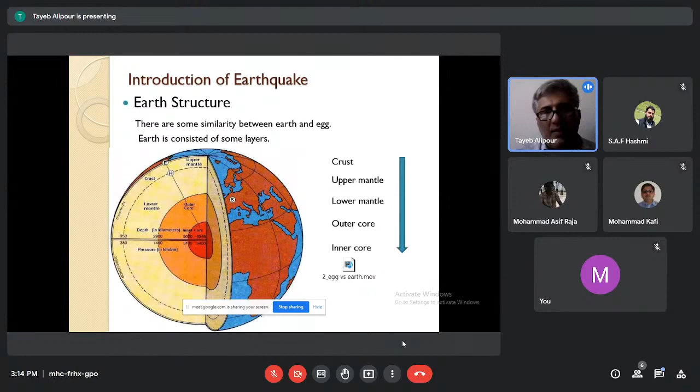6,370 kilometers is Earth's radius. In this slide, you can see the layers of the Earth with their materials. As you see, the inner core is solid and the outer core is liquid, then the mantle, and after that the crust. The crust is between 0 surface to 100 kilometers in terms of thickness.

And you can see other kilometers such as solid, liquid—for example, 5,100 kilometers is solid and 2,900 kilometers is liquid. Anyway, this is the basic information.

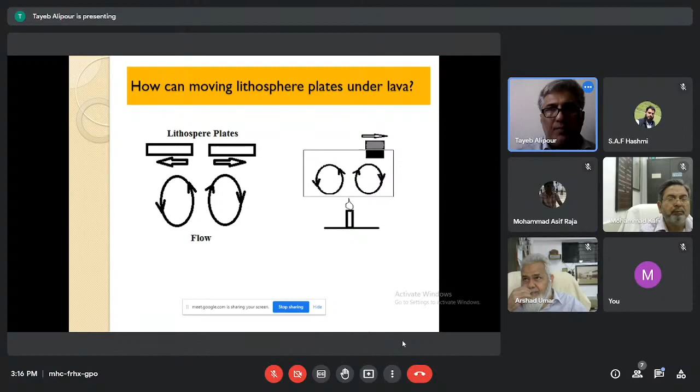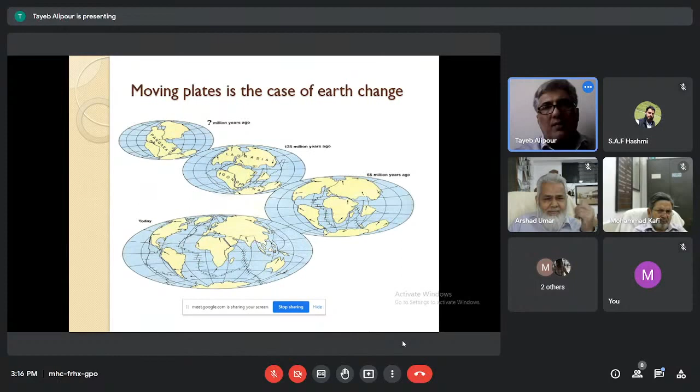You see on the left side, up to millions of years ago, all of the continents were together. After 135 million years ago, a little bit of change. After 65 million years ago, right side, similar to present. And today is the Earth as you see. But what will happen in the next 100 million years? Definitely it will change again because of moving plates. So Earth can change.

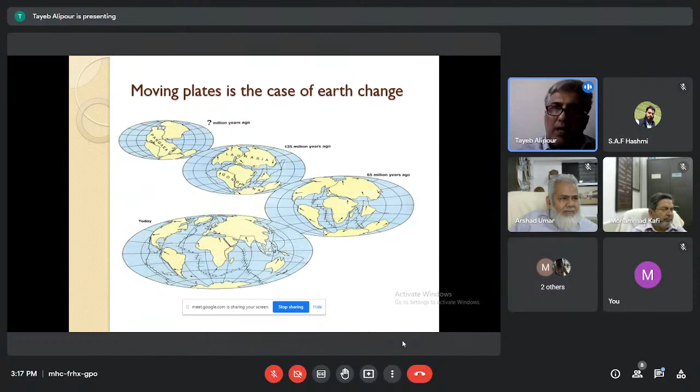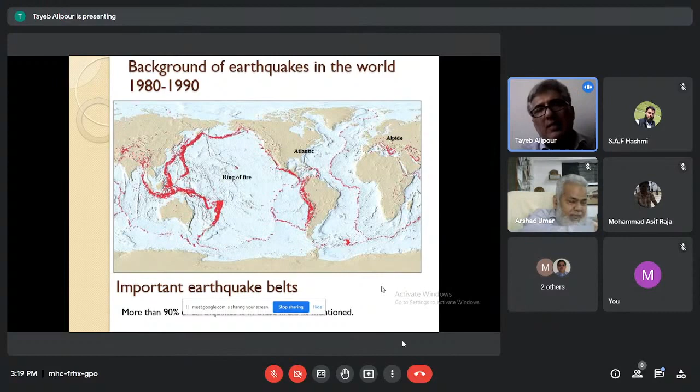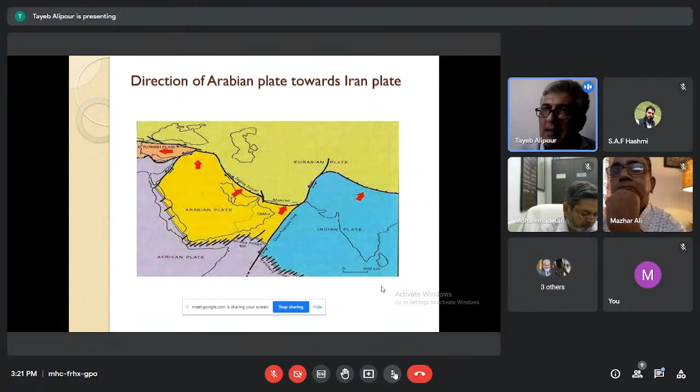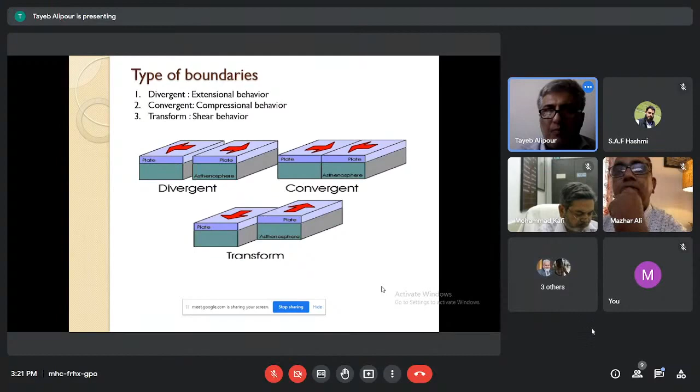There are a lot of movies, but we have not time because more than 168, I think, slides are possible to present in this time. So I can share this PowerPoint and you can see all of the movies at your home and your university.

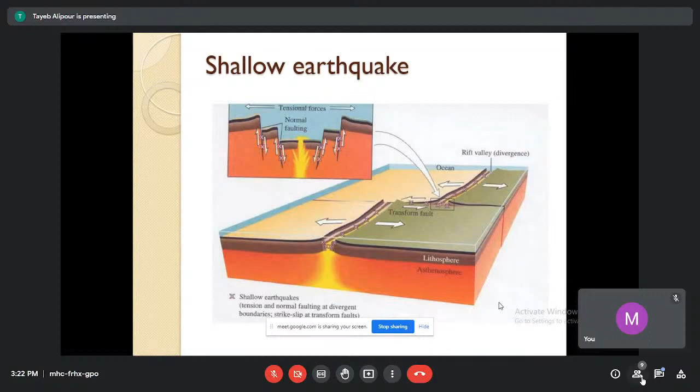Shallow earthquakes: tension and normal faulting at divergent boundaries, strike slip at transform faults, for lithosphere and other layers.

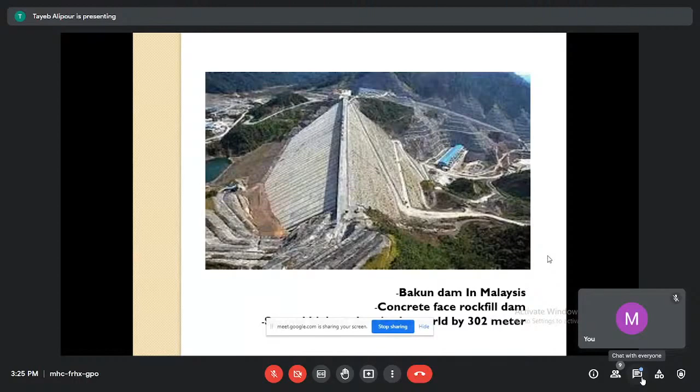And in this area, we have also peak ground acceleration, and it's under my study as I got it on 2012.

This is one example of dynamic analysis, and I use ANSYS software in this study. You can use ANSYS in terms of finite element, or ANSYS Abaqus, and in terms of finite difference you can use FLAC program also to analyze dynamic analysis of earthen dams.

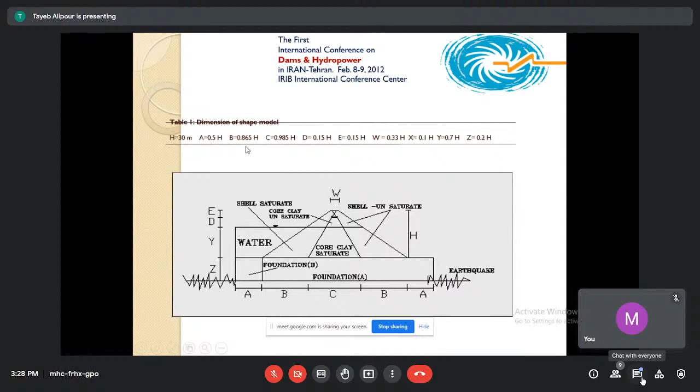You see the parts of the model, such as the foundation moved by the earthquake in this line, and the parts of the foundation behind the water, behind the saturated dam. You can see the core clay and shell, upstream and downstream, and the crest in this model. So I use this parameter, as you see, and analysis by ANSYS software.

I used the record displacement time for ANSYS. When I used ANSYS 2014 and 2012, I used displacement time, but with the new version you can use acceleration time, velocity time, or displacement time. I used version... this time is version 2021 possibly.

One more thing I want to share is that during the modeling, as you see in this photo, if you see my mouse, there are some key points to make a model: 1 and 2 at the crest, 3 up of the core at the middle, 4 middle of the core, and 5 middle of the foundation. This is the hot line, in fact.

During the dynamic analysis, displacement and acceleration at the crest is always maximum. Shear stress and shear strain behavior is so important to analyze for points 3, 4, 5, and others, but I focus on 3, 4, 5, 1, 2 because of their maximum value.

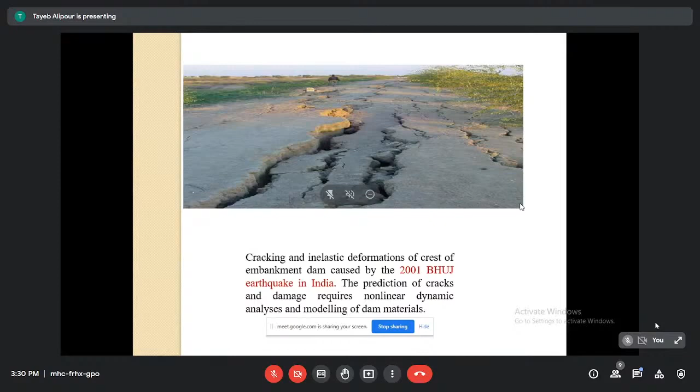Also, observation of performance of a dam during the 2013 Grassmere earthquake, upstream and downstream, exactly in this area, and at the crest you can see a lot of long cracks.

Also, observation of cracks. Next slide. You can see the various damages during the heat of water on the upstream, because this is dynamic pressure, not static pressure. When you focus on dynamic analysis, the dynamic pressure of water is so important on the upstream.

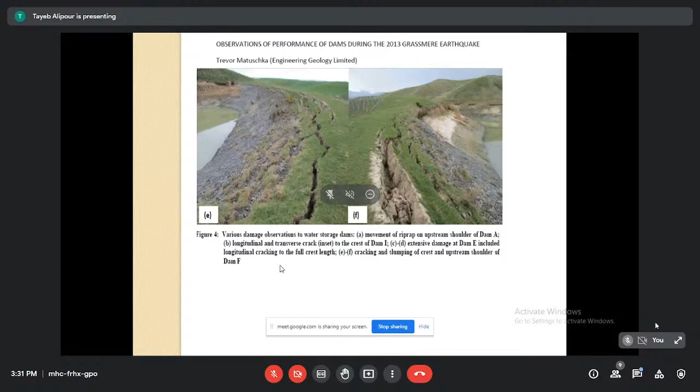You can see here, Tappar Dam displayed longitudinal cracks at its upstream during the Bhuj earthquake in India. Lateral spreading zone at the downstream of the Kaswati Dam.

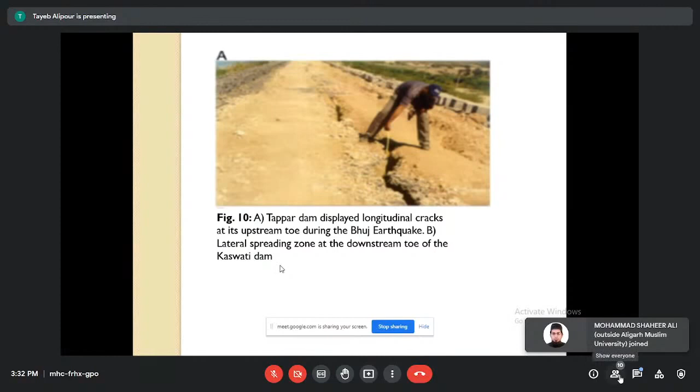Excuse me, do you have my voice? All right, because I was worried. There is nothing. Anyway, I will go on.

You can see the concrete slab dislocation at the Zipingpu Dam during the Wenchuan earthquake in China. This is one of the concrete face rockfill dams. After this earthquake, you can see long cracks at the slopes.

You see the settlement exactly at the middle of the crest in the Zipingpu CFRD, as reported by Xu Zeping in 2008.

Do you see my mouse, Professor Bilal?

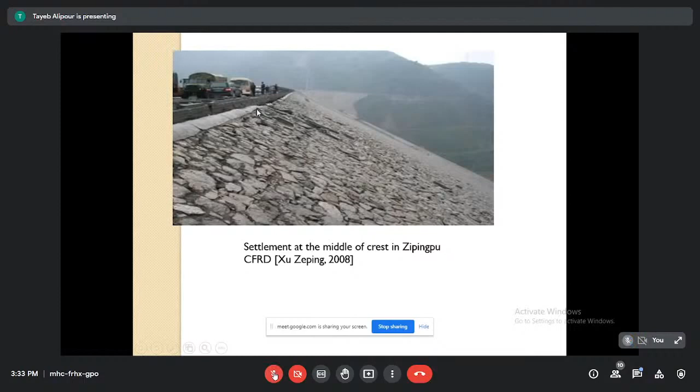Yes, okay. Because as you see, this is the middle of the crest, and the settlement is maximum exactly in this area.

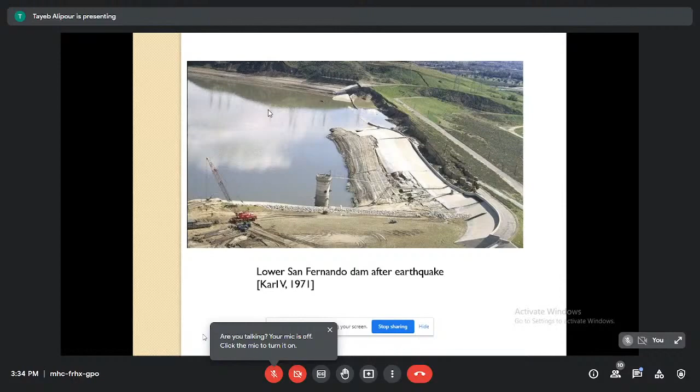So what happened? What should we do? There are some options to select. Just wait, and we will explain step by step.

In Los Angeles Dam, also a concrete face rockfill dam, after the Northridge earthquake in 1994, as reported by Robert, there are some cracks.

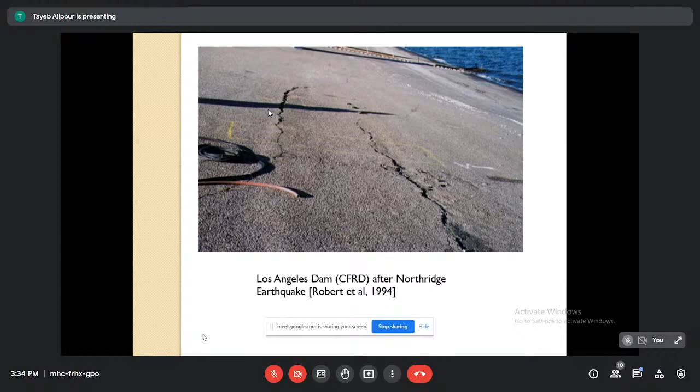Why? Because displacement at the crest is maximum and shear stress of soil is zero there. Shear stress in an earth dam is maximum at the base, based on soil dynamics and soil mechanics knowledge. Shear stress plays an important role in dam behavior during earthquakes, so when you have minimum shear stress at the crest, it's natural to have cracks and maximum displacement.

As you see in this slide, the cracks are wide, and after that it's so hard to process repair. For repair, I will explain next how.

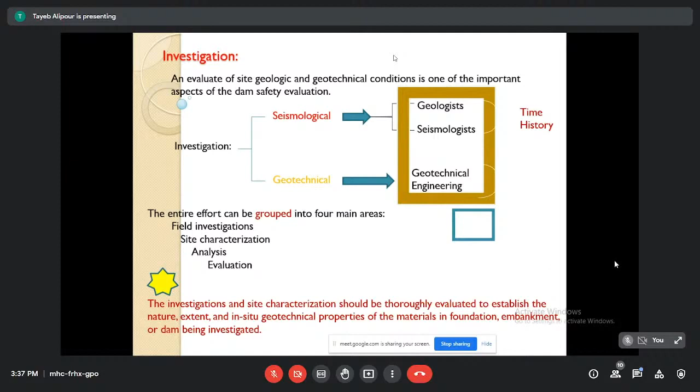Anyways, hydrodynamic effects: to include the earthquake-related hydrodynamic effects in stability analysis of water retaining dams, the hydrodynamic pressure, delta Phd, below reservoir water level may be estimated from the following, Zangar 1952. You can see the formula and you can see the charts, Y over H and pressure coefficient, as you need to get delta Phd.

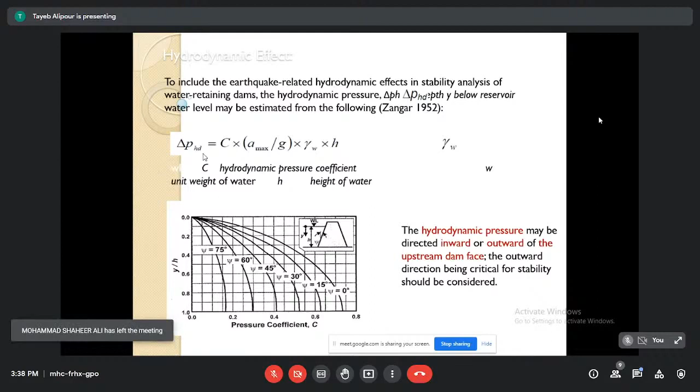The hydrodynamic pressure may be directed inward or outward of the upstream dam face. The outward direction, being critical for stability, should always be considered. In this slide, you can see the time history analysis of Bakun Dam. As I mentioned, it's in the east of Malaysia, Sarawak.

You see on the right side there are two maps. The first one is the peak ground acceleration or PGA map for 500 years in Malaysia. It was by my supervisor, Professor Azlan bin Adnan, because he was an earthquake engineer. And also he made in 2008 a peak ground acceleration map for 2,500 years.

So you have three colors, green, red, and blue here, and red and blue here, with different PGA. This is the Bakun Dam in the middle, and this is the meshing of the concrete face rockfill dam. This is aggregate rockfill, the face is concrete, and this one is water.

So when you want to model this type of dam, you must be careful about the interface between the rockfill material and concrete, and between the concrete and water. You need to model interaction effects. It's possible with ANSYS, and you see the boundary conditions used for this model, and you can see the key points in the dam body, 1, 2, 3 until 9, to collect the output data and consider what happens to them during an earthquake.

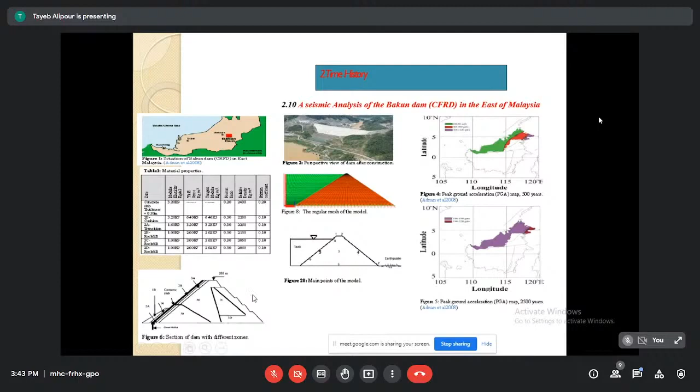And on this side, left side down, you can see the different materials used for the dam body. For time history, I used 3 records for this analysis, Figures 9, 10, and 11. You see, for different time and different peak ground acceleration, I used 3 earthquakes.

The first one is the Nahanni earthquake. Second, I have the Azna record and the Palm Springs record. One of them is near the 500-year PGA map, and another is the 2,500-year PGA map for Malaysia. So I selected the records based on the PGA map of Malaysia.

So you can see in different key points, you can see horizontal displacement and vertical displacement and shear stress and shear strain in order to consider the behavior of the dam during an earthquake.

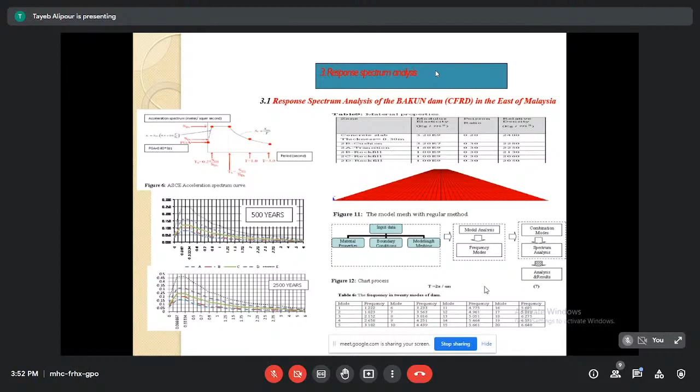Very good slides. Do you have my voice? Sorry, because I worry sometimes. Mr. Balal, do you have my voice? Yes, Professor, it is available. All right, thank you so much.

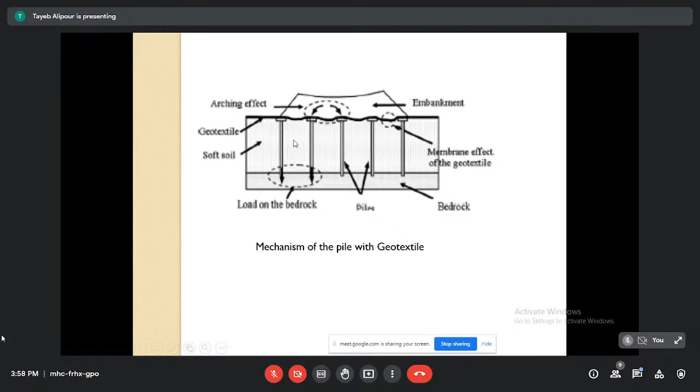But as you know, if this distance or this elevation is a little bit small, it's better to remove the soil, and compaction on the bedrock is the best way. But in this situation, surely this distance is high, and they couldn't remove the soil, so they used this type of soil improvement, piles with geotextile.

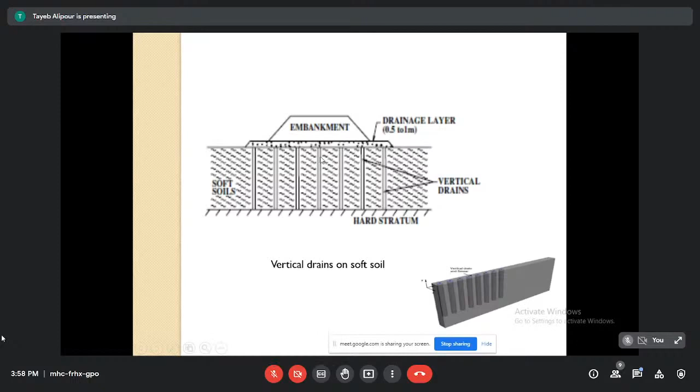So the shaking table is one way to study earthen dam behavior during an earthquake. You must install some strain gauges and transducers and other tools inside the dam body, and connect them to a data logger to see the result, and after that use the scales for dam analysis.

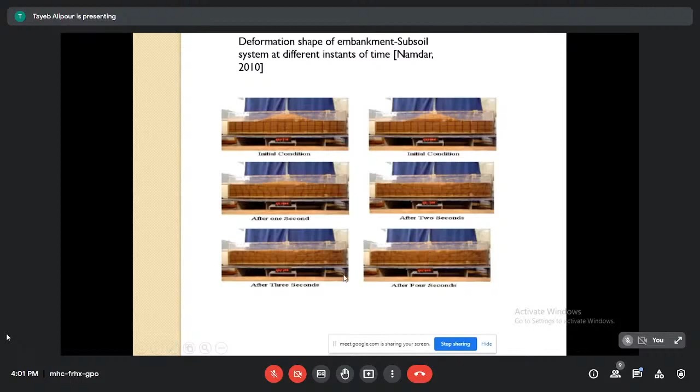Also, you can see the deformation shape of the embankment subsoil system at different instants of time by one of the best Iranian professors, Namdar 2010. You can see the initial condition, and after 4 seconds of earthquake, you can see there is not any dam here. The dam is ruined, generally damaged. Anyway, these are some examples, and you can see a primary centrifuge test, Wang 2011.

Also, I had one supervisor, Professor Dr. Rajiv Kumar from India, 2010. Unfortunately, I lost him because his contract was finished at UTM, and after that I worked under Professor Azlan bin Adnan at UTM.

I have no contact with him because he's not on Instagram, he's not on LinkedIn, he's not on ResearchGate, and I just have a connection by email, and the last email was 4 years ago. I am so worried about him. He was very good. He had 2 postdoctorates, one in Korea and the second in the United Kingdom, Leeds University, I think.

Anyway, he used a centrifuge for this type of test. He was very expert in this area, Rajiv Kumar from India.

There are a lot of good professors in India because India is big and has a large population.

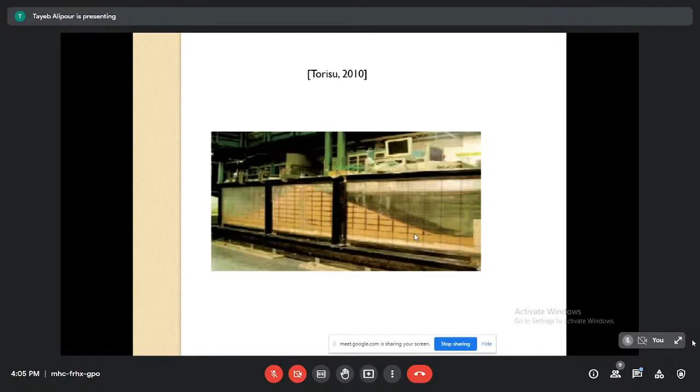Definitely your dam is consolidated, and this condition should be put in your model. When you want to analyze them during the construction, it's better to focus on slope stability, undrained, unconsolidated condition. UU materials is sufficient for your model. Short term, long term, which one do you have? Based on your option, you must put input data inside the software program. Please be careful about that.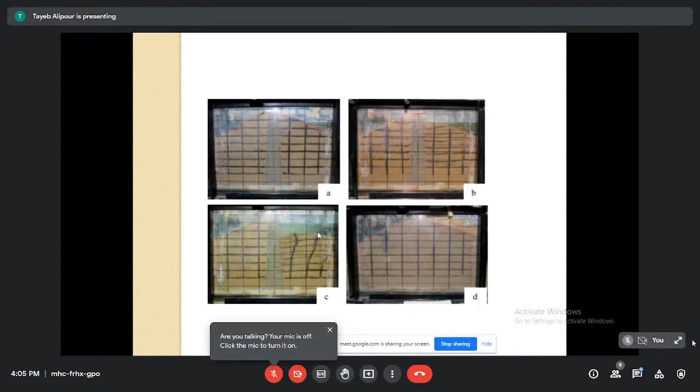And you see some shaking table tests here. After the deformation, you see the C condition, D condition, A and B. And damage in dams under earthquake is the problem statement, and damage is possible at upstream, downstream, and crest. Based on the literature review, there are some main notable words I want to share with you.

Acceleration is maximum at the crest. Maximum settlement is in the middle of the crest. Interface is very important for analysis. The amplification procedure related to the soil properties is very important. In fact, this is the site response effect. And the valley shape affects dynamic analysis, 2D or 3D. So valley shape is so important.

When you have a U shape, it's better to make an earth dam because you can use 2D conditions. And when you focus on 2D conditions, it's so simple for your PC to solve the problem by finite element. When you have 3D conditions, it takes time. Maybe you must use a huge PC to solve this problem.

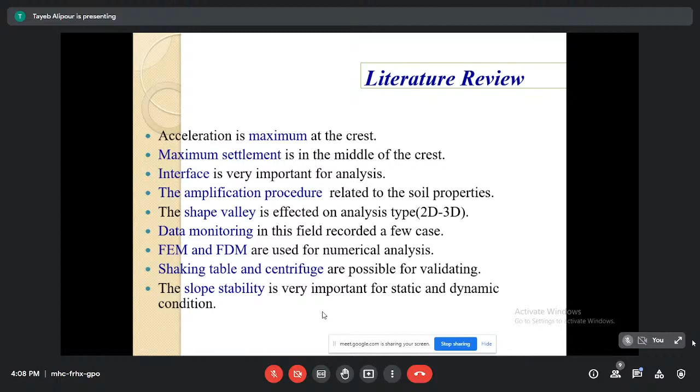use 3D analysis. Data monitoring in this field recorded a few cases. Finite element method and finite difference method are used for numerical analysis. Shaking table and centrifuge are possible for validating. Slope stability is very important for static and dynamic conditions. Slope stability, what is that? This is the safety factor, in fact, for static condition and dynamic condition during an earthquake. What's happened?

For this purpose, I suggest you use GeoStudio because GeoStudio is sufficient for earth dams, especially for seepage and slope stability analysis. And when you want dynamic analysis, I recommend you use ANSYS or Abaqus because you can manage the stress-strain behavior of different soil layers inside the body in terms of the hysteresis curve. As you know, the hysteresis curve is so important for damping, absorbing energy during an earthquake. So for quake analysis, please don't use GeoStudio; use finite element, Abaqus or ANSYS only.

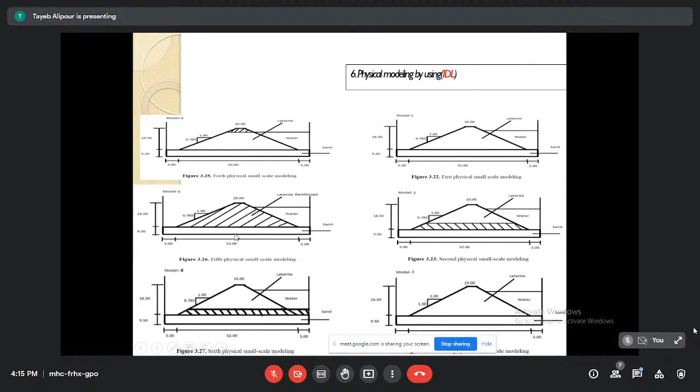As you see, this layer is on bedrock. Here is bedrock. After bedrock, IDL, 1/6 of this elevation. After that, the embankment, homogeneous dam, tested on the shaking table, and it was the best. Also, I used different models. For example, in this slide, you can see in all of the body I used IDL, but it was not good in terms of result because I had cracks again. And as I mentioned, 1/6 was the best result.

You can see in my physical model using IDL, I had failure at upstream the same as San Fernando Dam in the literature. Also the cracking network, and you can see longitudinal cracks at line C, also transverse cracks and other cracks at the crest.

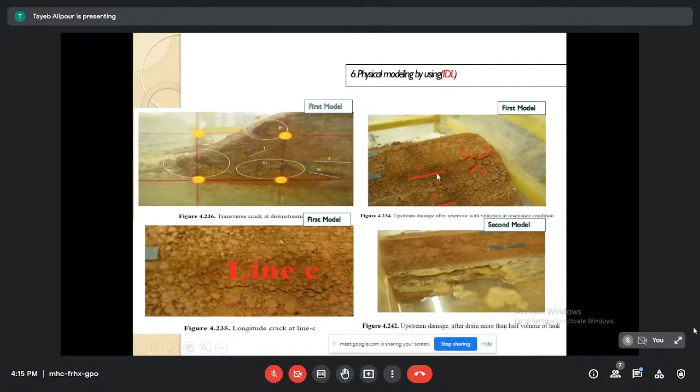Anyways, after all, I think I have just 30 minutes, maybe 40 minutes. Am I right? Yes, yes. Okay, I must go very soon because I have a lot to finish.

Okay, this time I want to focus on guidelines for seismic design of earth dams and embankments. It's for India, exactly. GSDMA, you can download it, and I recommend you read it carefully, step by step. This criteria is one of the best in the world. So you can see the general scope.

This criteria is related to Gujarat State Disaster Management Authority, August 2005, revised May 2007, and reviewed by ICOLD, International Commission on Large Dams. It consists of guidelines for earth dams of small to moderate size and embankments according to Indian code IS 11223-1985.

Before this one, I want to focus a little on failure mechanism. Structural failure of slopes and cracking is so important. Before deformation, you have piping, overtopping. Possible damage effects of earthquakes on earth dams and embankments include slope failure because of inertial loading and softening of material or liquefaction, fault displacement under the foundation, crest settlement, permanent deformation, sliding failure, and piping and erosion. Note: to avoid failure there should be defensive design measures.

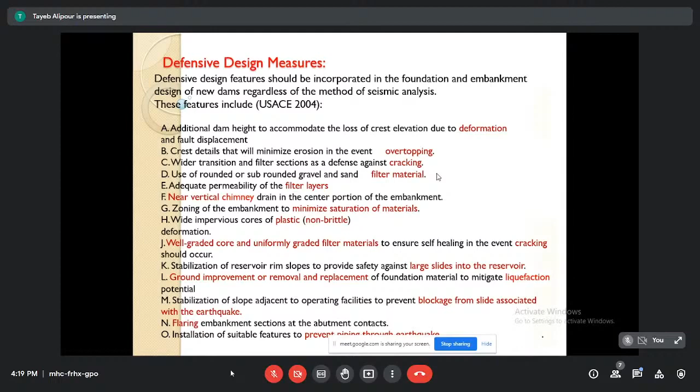Large slides into the reservoir are important. Stabilization of reservoir rim slopes to provide safety against large slides into the reservoir. Ground improvement or removal and replacement of foundation material, as I mentioned, to mitigate liquefaction potential is so important. Stabilization of slopes adjacent to operating facilities to prevent blockage from slides associated with the earthquake and flooding. All of them are important.

Also, about site-specific seismic assessment, small and intermediate dams or embankments, and peak horizontal ground acceleration, you can find a lot of good information in this criteria. This slide is repeated. I think I explained it previously.

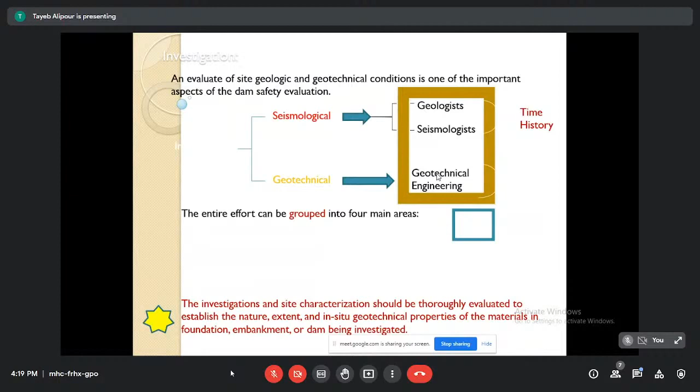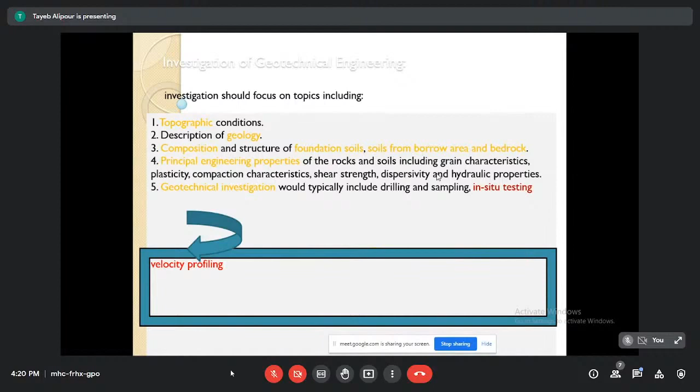So, geotechnical engineering investigation should focus on topics including topographic conditions, description of geology, composition and structure of foundation soils from the borrow area and bedrock, principal engineering properties of the rock and soils, including grain characteristics, plasticity, compaction, characteristic shear strength, and hydraulic properties. Geotechnical investigation would typically include drilling and sampling, in situ testing, SPT and CPT.

Also about location, this structure should not be constructed near the fault. It's so important. You must avoid constructing an earthen dam near the fault. If you want to, you must improve your soil by different options, using geotextile in different layers to increase damping, or using piles with caps to absorb energy before transfer to the dam body. This criteria tells you that the structure should not be constructed near the fault. In a near field earthquake, the hypocenter, the main point of energy release, has a distance to the surface. If this distance is less than 15 kilometers, it means near field earthquake. So when you have a near field earthquake or near the fault, you must avoid constructing the earth dam.

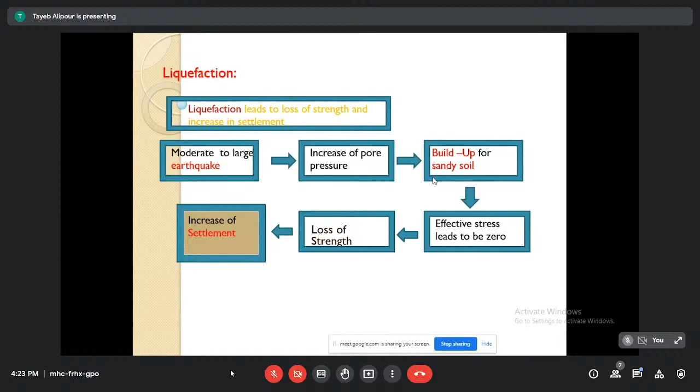And about liquefaction, it's so important. Liquefaction leads to loss of strength and increase in settlement during moderate to large earthquakes, due to increase of pore water pressure build up, for sandy soil and sensitive clay soil also. After that, effective stress leads to zero, loss of strength, and increase of settlement. Tau equals C plus sigma tangent phi, the Mohr-Coulomb formulation in soil mechanics. When you have liquefaction, you have less shear stress.

You can see about liquefaction, there are some slides on embankment. I have some better slides next, so I prefer to move on because I have no time.

What about in-situ ground improvement? As you can see here, you can use deep dynamic compaction, vibration compaction, vibration replacement, jet grouting, deep soil mixing, sand drains, blast densification, and sand and gravel piles.

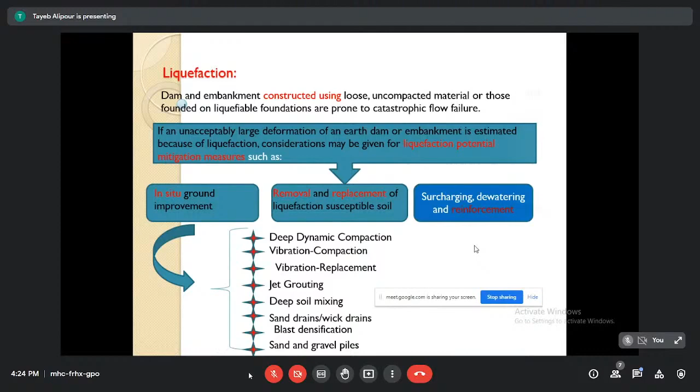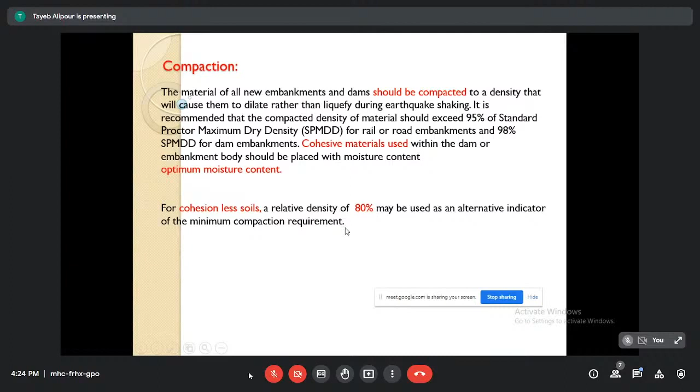What about compaction? For cohesionless soils, a relative density of 80% may be used as an alternative indicator of the minimum compaction requirement. It's so important. Totally, when you have very good, accurate compaction, during a moderate earthquake, not strong, moderate earthquake, I think you have no problem during an earthquake, moderate or small earthquake.

But about resonance condition, definitely in moderate PGA and small PGA, but with the same frequency for both earthquake and dam, definitely you have a problem. As I mentioned, resonance condition is very strong in dam analysis during an earthquake.

Anyway, so seismic slope stability assessment. You can see cyclic stress induced by earthquake shaking, the cyclic stress-strain behavior of the material within the body of the dam or embankment and foundation soils. Types of methods: equivalent static stability analysis, sliding block method, dynamic analysis, simplified or rigorous, which you can use when the maximum cross section of the dam...

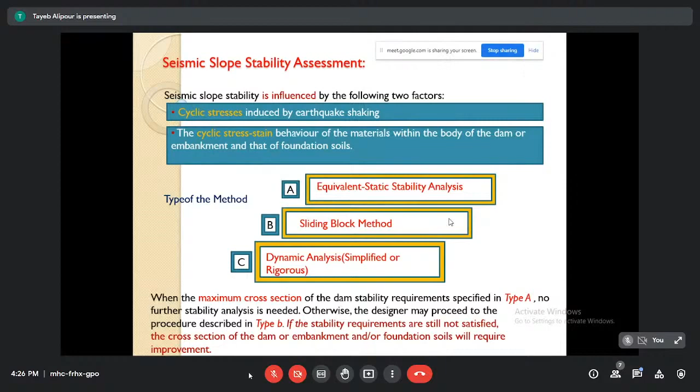In equivalent static stability analysis, a limit equilibrium factor of safety of 1 is usually considered acceptable in the equivalent static seismic slope stability assessment. But I prefer to recommend 1.2 as better, because 1 may leave a little room for errors during construction in terms of compaction and other options. So it's better to use 1.2 for the safety factor.

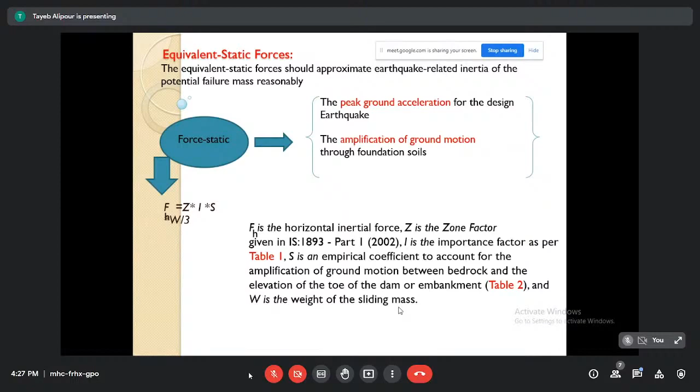Also, you can use equivalent static forces, related to peak ground acceleration and amplification of ground motion. You can use tables 1 and 2, both possible in this criteria. Also, about application of forces, soil properties are very important since earthquake loading is rapid. Stability for an earthen or embankment dam is usually considered under undrained conditions. Soil properties used in analysis should reflect softening because of pore water pressure generation and strain development and cyclic strength degradation.

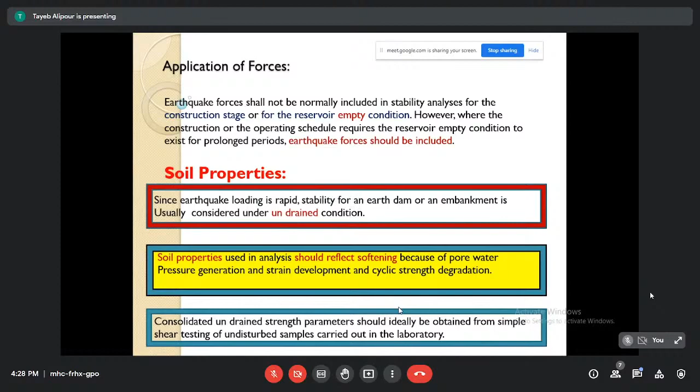Consolidated undrained strength parameters should ideally be obtained from simple shear testing of undisturbed samples carried out in the laboratory, and you can use CPT and SPT tests.

The undrained shear strength for cohesive soils is estimated using field vane shear test or other appropriate methods. If the dam foundation is underlain by sensitive clay soils, for undrained stability assessment, residual undrained shear strength should be used.

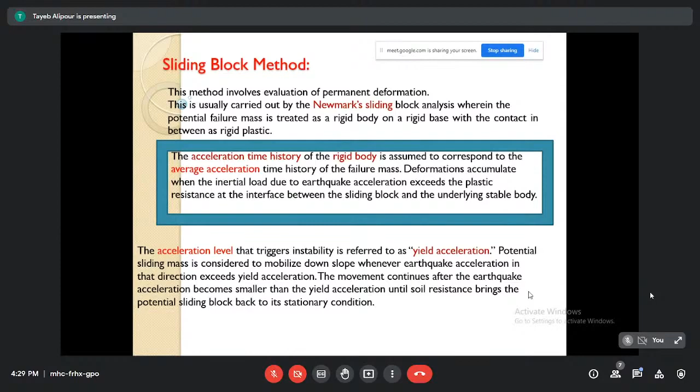Other notes: sliding block methods based on Newmark sliding. When you go to GeoStudio for slope stability in static or dynamic conditions, you use Newmark sliding. It's a very good and simple software to try and error slope stability, as I mostly use. Sliding block methods can also be defined based on Hynes-Griffin and Franklin methods.

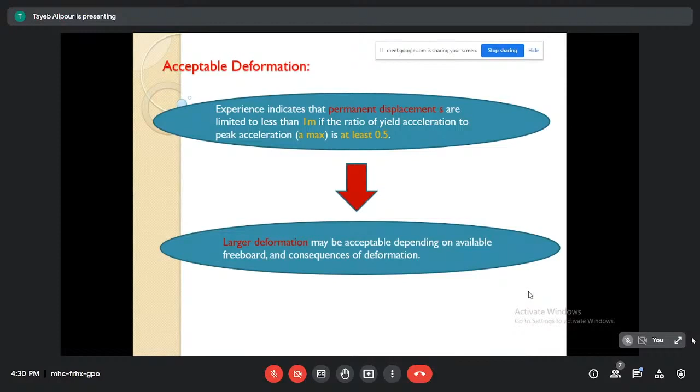What about acceptable deformation? Experience indicates that permanent displacements are limited to less than 1 meter if the ratio of yield acceleration to peak acceleration Amax is at least 0.5. Large deformation may be acceptable depending on available freeboard and consequences of deformation.

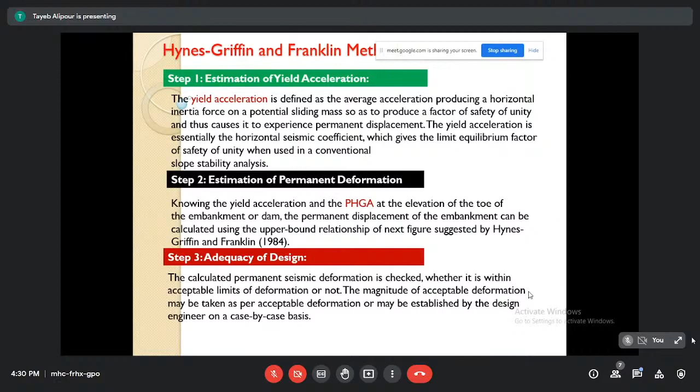Also, you can use the Hynes-Griffin and Franklin method for peak horizontal ground acceleration.

Dynamic analysis employing a nonlinear stress-strain relationship provides a rational framework for estimation of the deformation of an earth dam or an embankment.

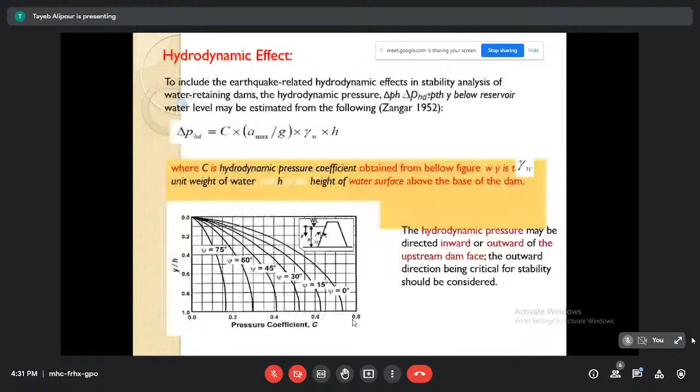Also about hydrodynamic effects, instrumentation, inspection, and monitoring - this is very important for dams. All of them are important and should be done.

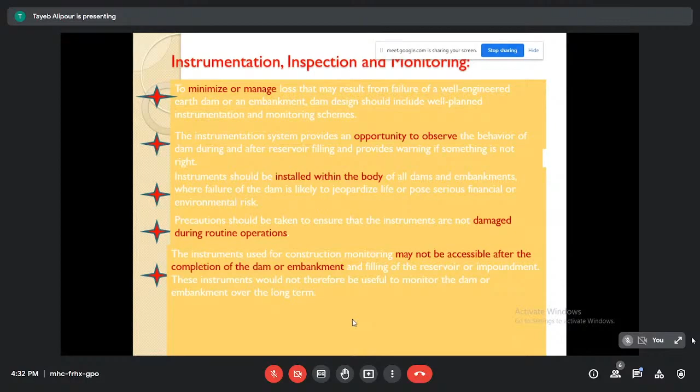About inspection: an embankment or a dam should be inspected once every year and/or after the occurrence of an earthquake of magnitude 5 or above, with an estimated free field peak horizontal ground acceleration of 0.1g or more at the dam site. The inspection team should include a qualified geotechnical engineer and a surveyor with adequate experience in dam safety monitoring and visual inspection.

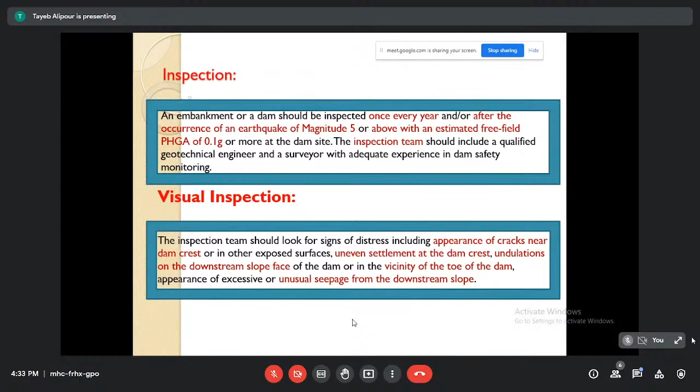The inspection team should look for signs of distress, including appearance of cracks near the dam crest or other exposed surfaces, uneven settlement at the dam crest, undulations on the downstream slope face of the dam or in the vicinity of the toe of the dam, and appearance of excessive or unusual seepage from the downstream slope. All of these should be checked.

Monitoring of instrumentation and surveying monuments should include the following: serviceability, whether the instruments are in working order and appropriately calibrated, measurement of permanent deformation, and checking measuring devices to see whether there is any unusual fluctuation of seepage rate since previous monitoring.

Readings should be taken on a prescribed schedule, and data should be carefully evaluated by a qualified engineer. A record of all inspection routines should be maintained in a prescribed format. Reports from prior inspection and monitoring activities should be available to the inspection team at the site during field work. Any unusual observation should be communicated to the dam authority and to the regulatory authorities by the inspection team as soon as those observations become available.

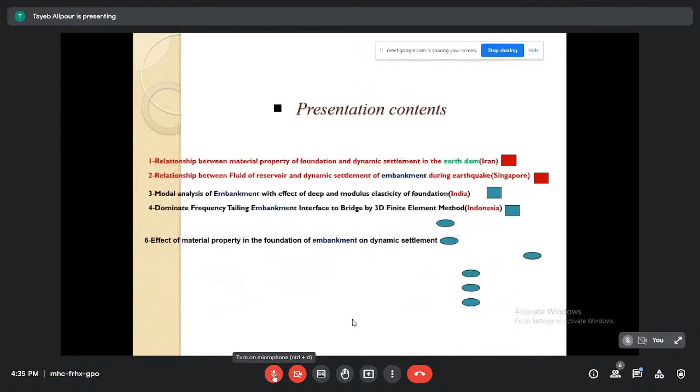So for the final part, I have some study - maybe 10 minutes. The relation between material property of foundation and dynamic settlement in the earth dam - I want to explain a little bit about this study.

There are some studies, as you can see, 10 studies in this next slide: relation between material property of foundation and dynamic settlement in the earth dam, as presented in an Iran conference; relationship between fluid of reservoir and dynamic settlement of embankment during an earthquake, presented at a Singapore conference; modal analysis of embankment with effect of depth and modulus of elasticity of foundation, in India; dominant frequency of tailing embankment interface studied by 3D finite element methods in Indonesia; and other studies, as you can see here.

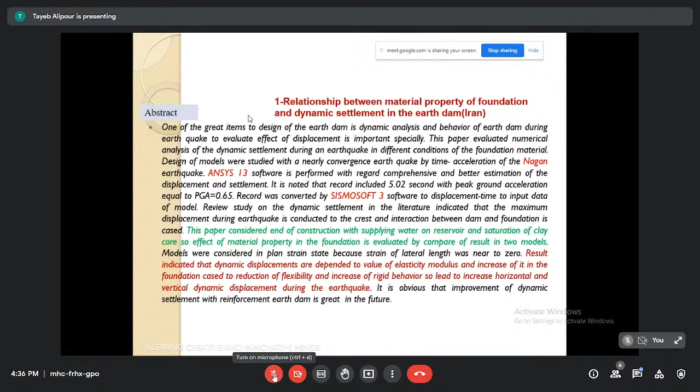I'll explain some conclusions about these studies as investigated. The first one: relationship between material property of foundation and dynamic settlement in the earth dams. I'll focus on the conclusion here - the effect of foundation properties of the embankment on the dynamic analysis were evaluated in this study.

Dynamic displacement depends on the value of elasticity modulus, and an increase of it in the foundation case leads to reduction of flexibility and increase of rigid behavior, leading to increase of horizontal and vertical dynamic displacement during the earthquake. Numerical analysis had good agreement with literature review.

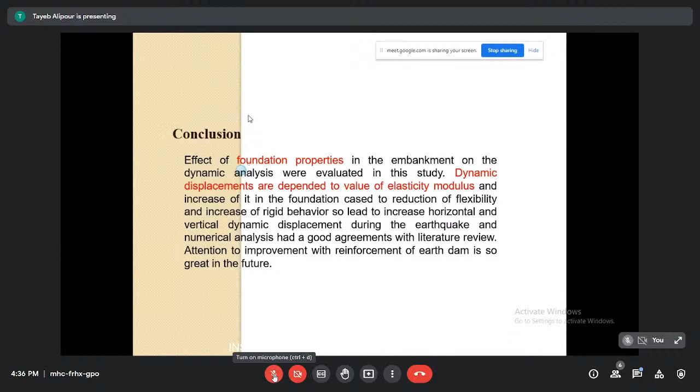Attention to improvement with reinforcement of earth dams is very important for the future. Another study looked at the relationship between fluid of reservoir and dynamic settlement of embankment during an earthquake. I explained the abstract and the model.

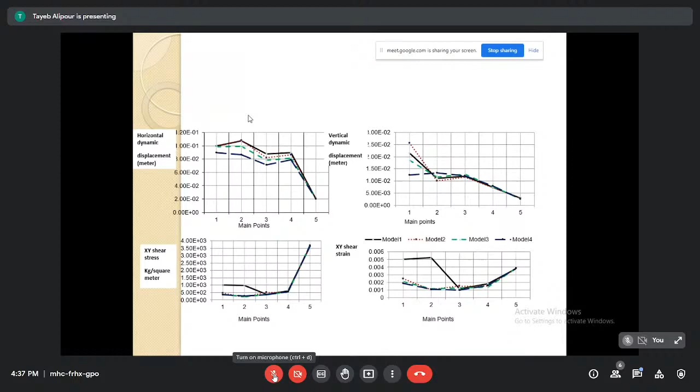Dynamic analysis of a medium-sized embankment with saturated material properties in the dam and soft soil foundation, under an earthquake of peak ground acceleration 0.65 G strong earthquake, considered displacement, shear stress, and shear strain depending on the alpha ratio, which is related to the height of the fluid water level in the reservoir. Comparison of results at 5 reference points of plane strain 2D dynamic analysis indicated cracks at the crest and settlement in the foundation when the alpha ratio reached a critical value of within 0.9 to 0.95.

It was found that the best ratio alpha, HW over H, to prevent damages is equal to 0.80. In fact, this study is related to the freeboard. So I suggest that 80% of the height of the dam is good, and 20% is good for freeboard during the dynamic analysis.

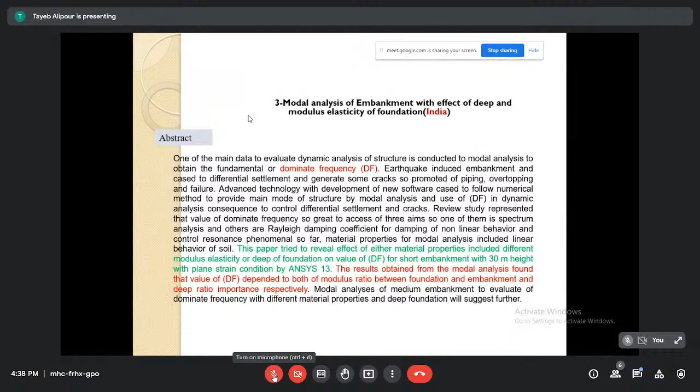So what is the dominant frequency? This is the big question. When you analyze, the dominant frequency is the minimum frequency among the mode shapes. When you do a free vibration analysis, as I mentioned previously, you have n nodes, so you have n mode shapes. When you make a mesh with n nodes, it means you have n mode shapes.

Which one is the dominant frequency? Mostly the first mode or second mode is the dominant frequency with the minimum frequency, because the minimum frequency leads to the highest and maximum period, based on earthquake engineering knowledge.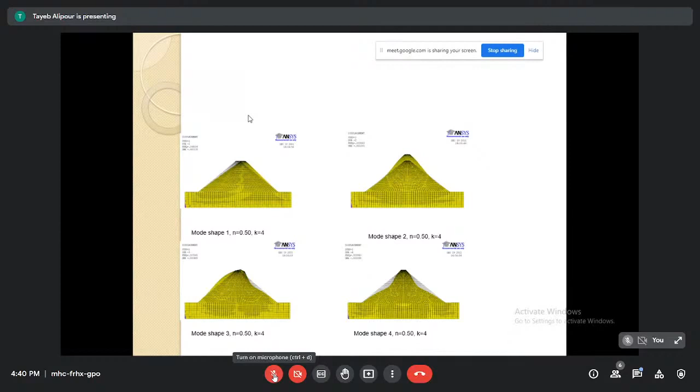In conclusion, modal analysis of the short embankment was performed by finite element and plane strain 2D to evaluate the effect of modulus ratio and depth of foundation ratio on the value of dominant frequency. Results indicated that the value of frequency was minimum and critical for resonance in the modal analysis for all models, giving the dominant frequency.

Increase of shape modes leads to a rise of dominant frequency, and modulus ratio more than 3 leads to rigid behavior of the foundation. Increase of both ratios causes reduction of the maximum and minimum value of vertical displacement in the slopes and horizontal displacement, but the effect of modulus ratio was greater than the depth ratio.

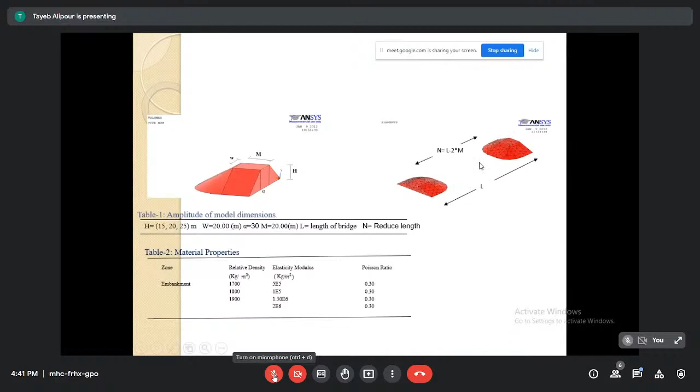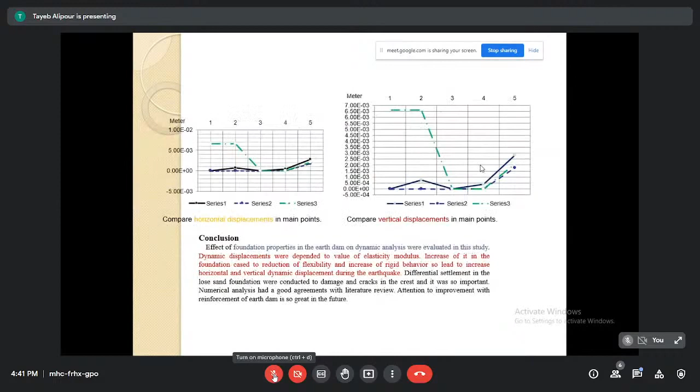Another study looked at dominant frequency again, for a bridge connected dam. In fact, as you see, there are 2 embankments and between them is a bridge, same as London Bridge. This study was for this conference, and you can see all of the mode shapes and distribution of shear strength, shear stress, and displacement, vertical and horizontal, done using ANSYS. The effect of material properties under dynamic conditions was also investigated, and you can see all of the results.

I'm looking for one very important slide.

About Poisson ratio: when you focus on dynamic analysis, you must input correct data to the software. When you input bad data to the software, you will exactly get bad output data to analyze. So I recommend you to be very careful about the Poisson ratio.

Poisson ratio for saturated soil is more than unsaturated soil. Please be careful about that. For example, for saturated clay, based on the literature, the Poisson ratio is between 0.45 to 0.49.

Maximum Poisson ratio is 0.5. I think water has the maximum Poisson ratio. So please be careful about input data, exactly about elasticity modulus, tangent modulus, yield stress, friction coefficient in terms of interface and interaction effects, and also Poisson ratio.

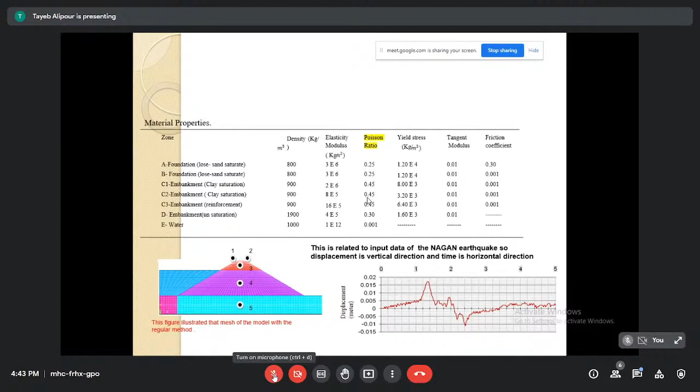So you must use each of these exactly and correctly.

Also about this software, I want to share information. Maybe I have just 2 minutes or 5 minutes. Seismosoft software, what is this? This is a good software related to Berkeley, California University. You can get it by academic email, just registration by academic email. You can get the newest version of Seismosoft software. When I was a master's student years ago, I used the first version. It was free of pay, and it's very good software to

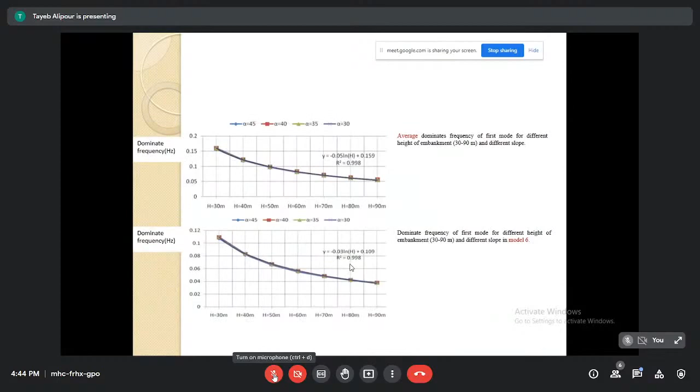convert displacement to velocity and velocity to acceleration, or reversely, by time. In fact, you can convert displacement time to velocity time or acceleration time, and also you can change the acceleration time to velocity time and displacement time reversed. So all of them are possible to see. I'm so sorry because I have no time.

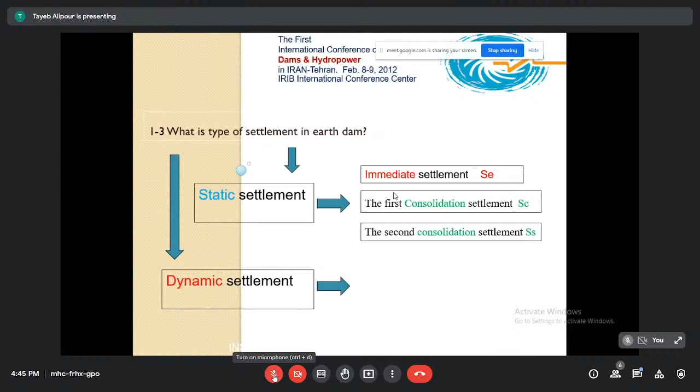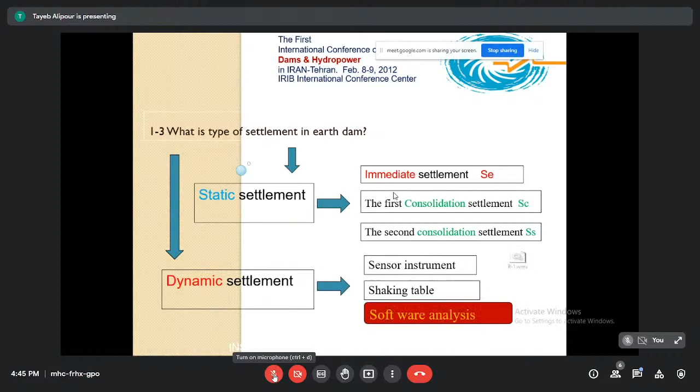And failure mechanism of earth dam is also so important. Overtopping, piping, and structural failure are so important in failure mechanism of dam. Earthquake loading may trigger any of the above failure modes or their combinations. So for dynamic control, slope control is so important to supplement dynamic factors. And operational life of the dam or embankment is usually 50 to 100 years.

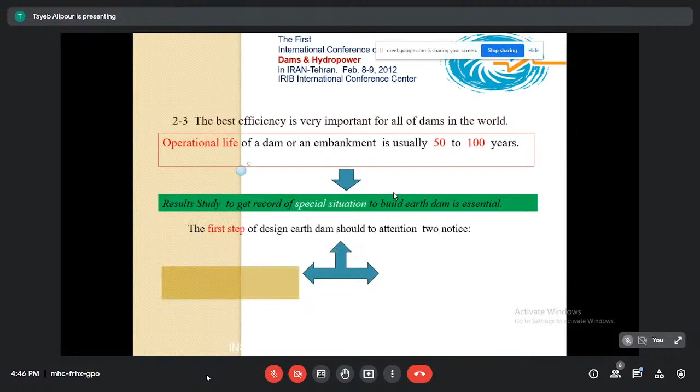Study to get records of the specific situation to build an earth dam is essential. And the first step of design earth dam should be attention to the geotechnical study and earthquake background of the site, or whether it is near to a fault. And this slide is repeated. And literature review, as I explained. And this slide is so important for research methodology. Literature is journals, books, and conference papers you can use. And so we have no time.

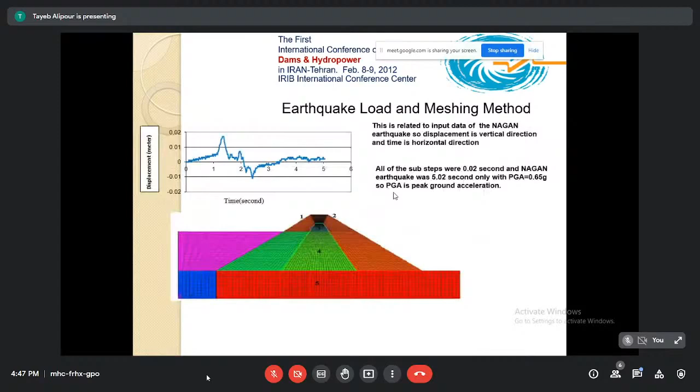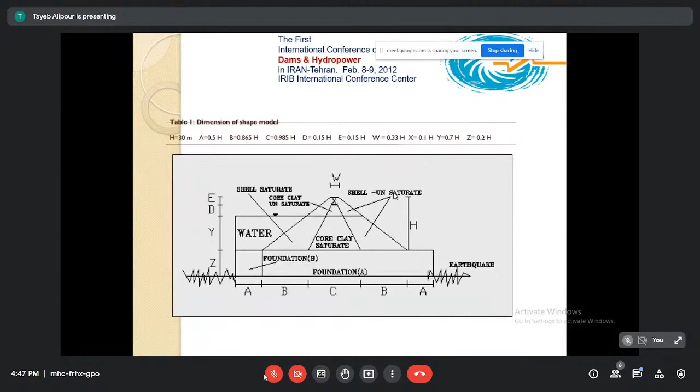Oh yes, that's the conclusion. So before that conclusion, I want to share with you just this important 1 minute. If you want to go to dynamic analysis, you need a good chart. In fact, the first is input data for ANSYS or Abaqus software. You need soil and rock shell, soil for core and foundation. You need elastic modulus, shear modulus, density, Poisson ratio, tangent modulus. You must get all in the soil lab.

And about rock fill as used in the shell, also elasticity, shear modulus, density, Poisson ratio, tangent modulus, all of them in the rock lab. Also, you must collect the time history and main records based on the site effects. And for fundamental frequency design, you must focus on SeismoSignal software. As I explained, it's from Berkeley, California. Also, you must focus on modeling and analysis, free vibration analysis to take out the dominant frequency.

Exactly, if you want to have a spectrum acceleration analysis, you need different mode shapes, as I explained 1 hour ago. You need frequency in different modes. You need free vibration analysis. And about time history analysis, it's better to select records based on the site background. So if you go to the site and you want to design the earth dam, it's better to firstly focus on the background of the site in terms of earthquake. When you have it, you can use these records for your structures.